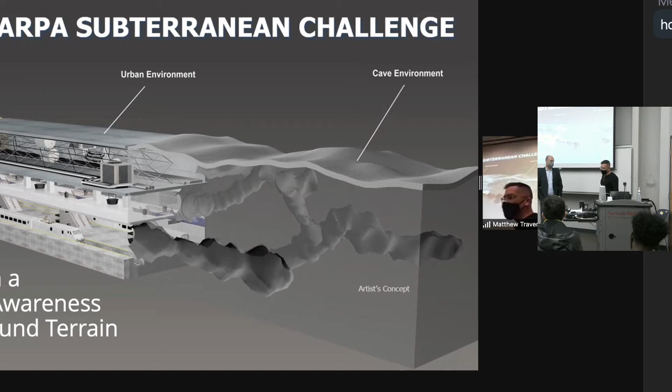For anyone who's not familiar with the challenge, the idea was to go and rapidly gain situational awareness in underground environments. There were several different target environments corresponding to the 3 years of the program. The first was tunnels, the second was urban infrastructure, underground infrastructure like a subway system, and then the last was cave. They weren't necessarily meant to be growing in complexity.

There were roughly 3 circuit events over 3 years: tunnel, urban, and cave. Cave was actually canceled due to COVID, but the final competition, which was just in September of this year, 2021, was actually a combination of all 3 of these. We'll show you some videos from the actual competition. But at a high level, that was the challenge.

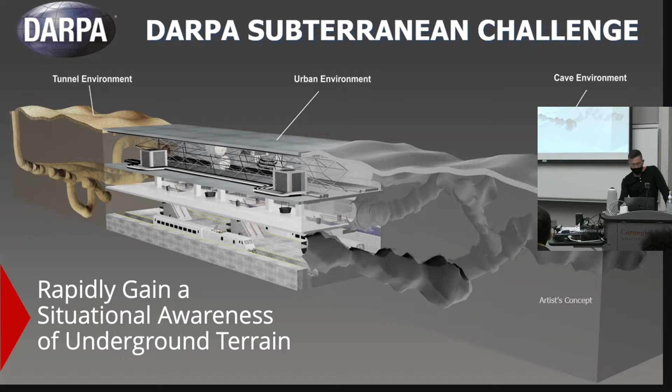So these are some of the different things - this is like the kitchen sink of full stack robotics, a phrase that gets thrown around a lot now. This was everything and then some, so all of the different challenges we faced, from sensing to comms to planning to aerial robots to ground robots, multi-vehicle coordination, and everything it actually takes to make that work.

So that was one of the reasons - not everybody has this use case of being underground, but in terms of stressing your robots and putting them in an environment or situation where you really have to go and solve the problems in order to make it work.

Also you have to correctly localize the artifact in a map that you're building and then recognize its type. So you have to have the perception working with the mapping, and then have everything - for us, it was then sending that information back over the comms network to the base stations to try to score points.

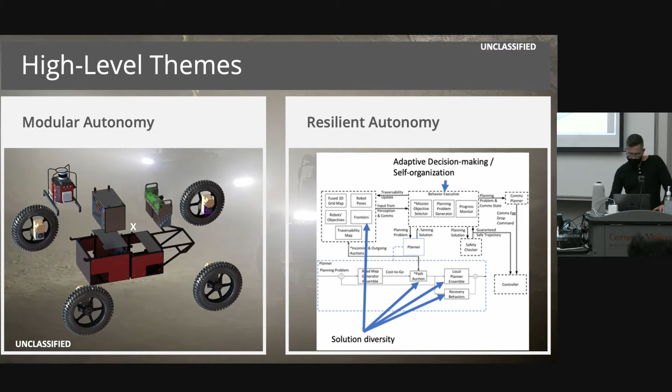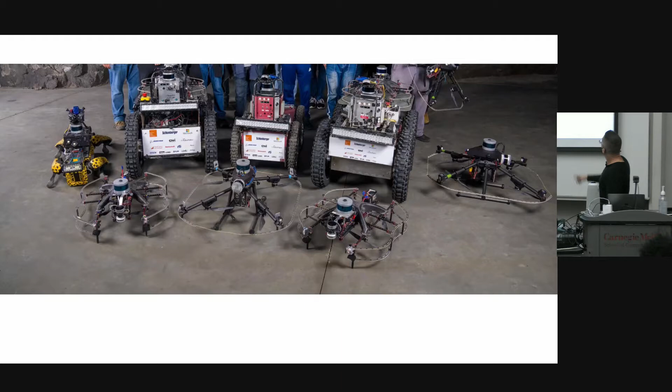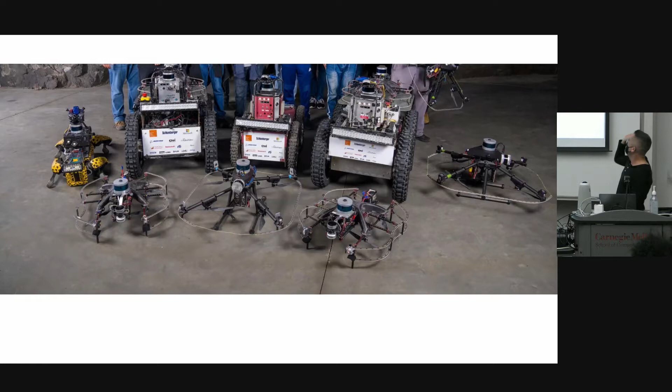All right, so for better or worse, all but the Spot robot, we built all of our own hardware. So it turned out to be 3 ground vehicles, a bunch of drones, 7 drones in total. These custom drones we built, this was a company actually started by 2 former Robograds called Canary. These larger drones, and then everything else was custom except for the Spot, but the payloads on everything were custom. So there are several different generations of payloads, and a ton of hardware that we built.

One of the interesting things, I'll show this in the next slide, that was a huge challenge for us was, you go out and design autonomous robots. I can tell you how to do inverse kinematics, right? But having to deal with the communications underground, it's primarily line of sight. So you can't just stick a radio down a tunnel and hope for the best. It's actually mostly line of sight, depending on what your radio is. So this is a huge problem.

I mean, we still haven't solved it. We've barely even scratched the surface after 3 years, to be honest with you. It was one of the things in the final competition that gave us a lot of pause was actually the comms, and we'll get more into that. But these were something we were particularly proud of.

The robots autonomously laid out these nodes, and I'll get into some of the details on this as it went down the tunnel. We built everything other than the radios, everything to drop the nodes, the whole 9 yards.

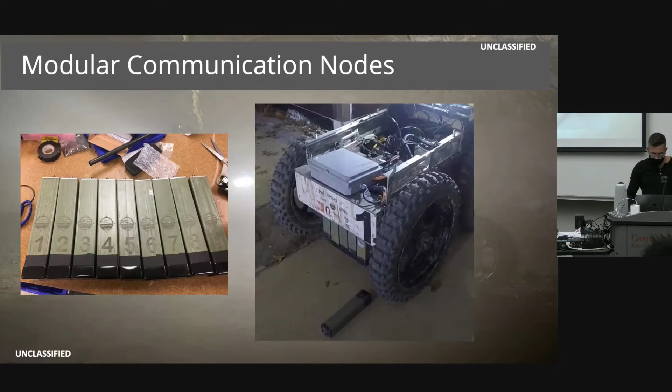And then this gives you some high-level systems diagram for the actual autonomy itself. So again, it's everything in the kitchen sink, but it's a full stack, right? It's starting from scratch, and then you have to do everything, from the low-level controls, sending motor controls to the motors, all the way up to the mapping, the estimation, map building, and everything in between. Modular, resilient, and scalable, is our overall philosophy from the autonomy perspective.

All right, Sebastian. Okay, so I think like Matt said, there's a lot of cool technical things that we implemented and developed over the couple of years, and we just want to show you a couple of them. Unfortunately, we can't show you everything, that would take probably half a day. So we just kind of picked a couple of things to highlight.

So one of the things that might also be interesting to some of you is we developed a SLAM algorithm, and there's a lot of people from the team also in the audience here, so if there's any detailed questions, we can defer them here. The high-level idea for this was that IMUs can give you very good data for SLAM, but they're usually used as kind of an afterthought, or just as an initial guess. The idea was to try and turn it around and use the IMU as my main source of odometry, and then use external sources of odometry as a way to correct the drift of the IMU.

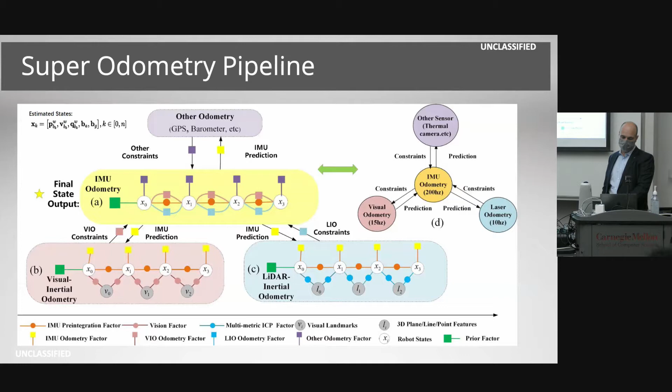So it's basically a couple of different smaller factor graphs that are set up and interact with each other. And so that was running on all the robots, so all the mapping results you see from here.

And another thing we had to look at is, how do we make this work in a wide range of environments? One of the things we wanted to avoid is, we can't just make it work in hallways or a cave or a tunnel, right? It has to work in all of these environments. And so some of the things you can get away with in a kind of research algorithm, we actually had to address.

It's automatically trying to scale which features are used for calculation depending on the size of the environment. So if you're in a hallway, use more features from closer in. If you're in a wider open space, use less.

Similarly for computation, the drones can process less than the ground robots, so they use a different computational budget, and it's adjusting to that. Another example is dust. Typically dust will cause a lot of features close by that your SLAM algorithm might get confused by, so detecting that dust and then ignoring it is another feature we essentially had to end up developing.

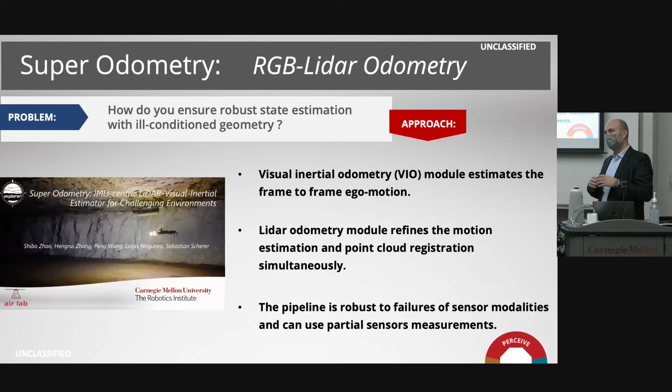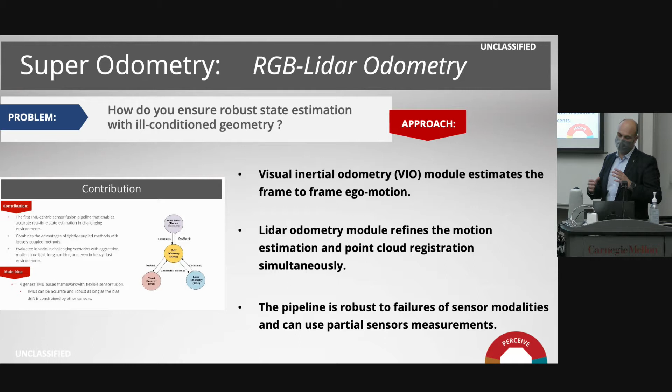As part of the challenge, we developed different pieces, like visual, LiDAR, IMU odometry. In the actual challenge, we only used the LiDAR component because that was the most mature. Some of the visual parts used too much computation, and we didn't feel they were mature enough, and we actually didn't need them because it worked good enough.

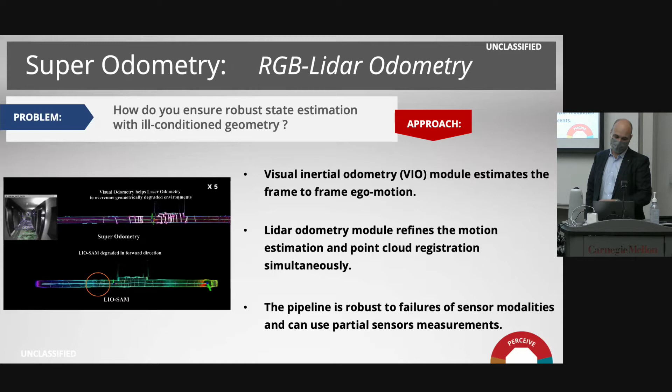But as part of it, here's a visual part. If you're in really degraded situations, a LiDAR alone will not give you enough information.

Similarly, part of the challenge was to push further. There was fog in the environment, and if the fog is really dense, you can't see through it. So we also developed thermal inertial odometry that can keep estimating in fog. But it turned out in the challenge the fog wasn't dense enough to really be a large issue for the odometry, so we did not deploy this.

Part of the challenge is object detection and localizing these objects, like Matt mentioned. There's actually a lot more than just an object detector that goes with it.

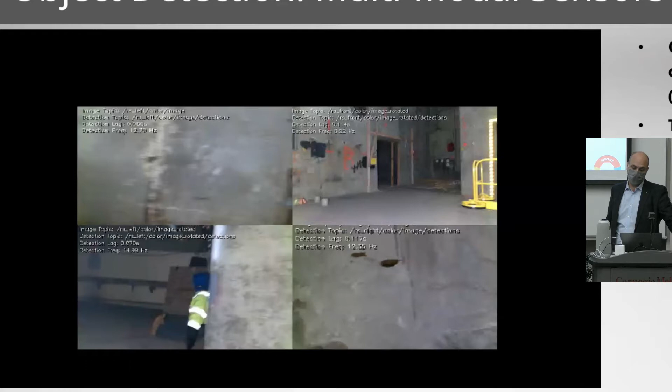For the visual objects, we basically create a bunch of 3D estimates and then cluster them together, and then create an object detection that gets sent to the base station. Those estimates can come from visual as well as the thermal camera. There would have been good opportunities to do 3D object classification, but for time reasons we didn't get there.

On the planning side, we'll talk about a couple of different interesting bits for the different robots.

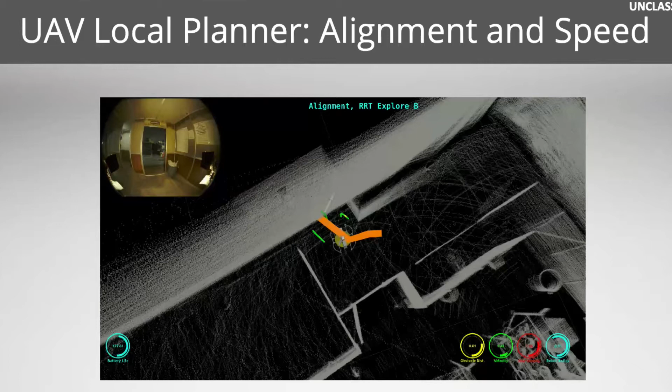One of the things that's pretty hard for the drone side is how do you fly through narrow spaces? Our drones are 60 centimeters wide, and we want to fly through spaces that are maybe 70 centimeters wide. So the drones essentially detect when there's a narrow passage, line up, go through, and then fly through these narrow spaces. You can see here, this is from the final competition where the drone flies.

Also, we want to fly as fast as possible since our flight time is limited. We only have 10 minutes, so we want to really go fast when we get the chance. Here's a wider open space, so the drone will try to go about 2.5 meters a second and cover as much area as it can.

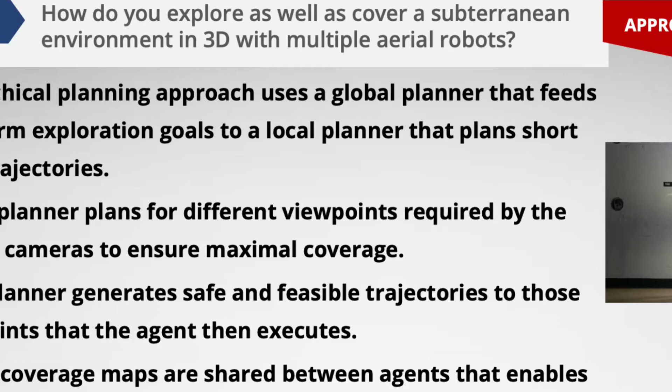So once we can fly, we have to figure out where we're going to go. All of this has to happen in real time on the robots while all the other pieces are running: SLAM, object detection, flight control. So there's a lot of stuff happening on the robots, so we have to make lots of trade-offs for all the different components in terms of computation for SLAM versus how much do we give to planning versus exploration, object detection, and so on. For the exploration, a large part of it is, how do we get it fast enough and within enough computational budget?

So the approach we took is the following. The other thing that's worth noting is that it's not purely an exploration problem. Like your typical classical exploration, you'd say, okay, how much of the map have I seen? So it tells you, if you have your LiDAR, if you move, how much of this white area have I covered?

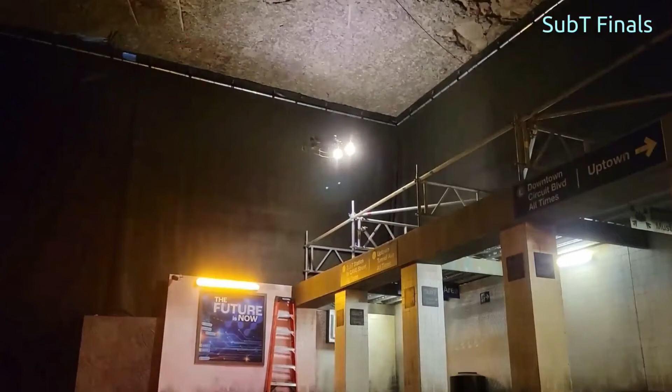And here you can kind of see going into some of the narrower areas. Part of the challenge for the exploration is, in these larger areas for example, how do you trade off between covering a wide area very well versus going to a smaller opening that could get you to even more information to find? That's often a tricky challenge that we have to navigate.

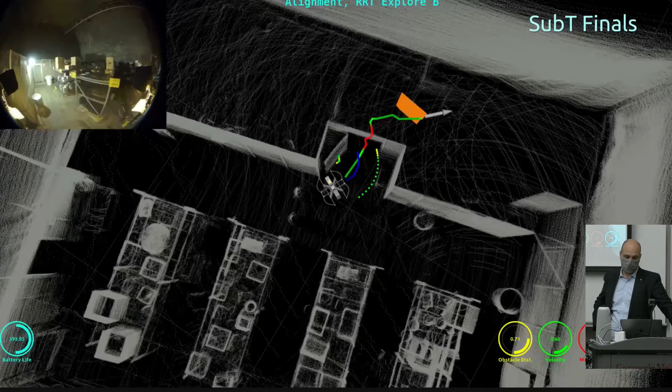See if there's anything else. So here's, for example, some of the experiments at Laurel Caverns. The robot will explore in 3D, so it will essentially go up and down, and it's not really afraid of getting close to things.

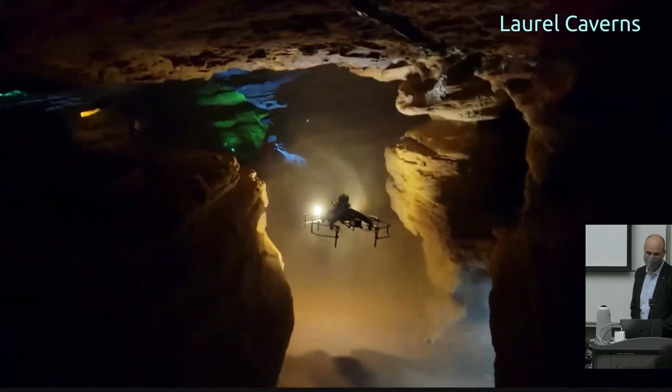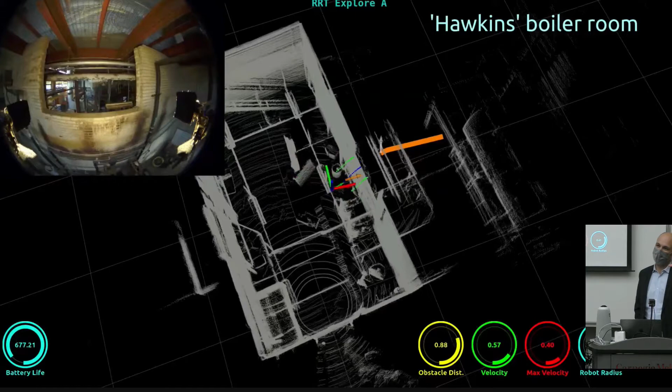One other thing that is a bit of a challenge with the particular setup of a robot is that we have a Velodyne sensor on there, and it only has a 30-degree field of view. So when you're flying in something that is very 3D, it's difficult to decide, can you actually go up or down, or is there more to explore? For example, Laurel Caverns has a 30-degree kind of slope, which is exactly at the limit of what you'd actually see.

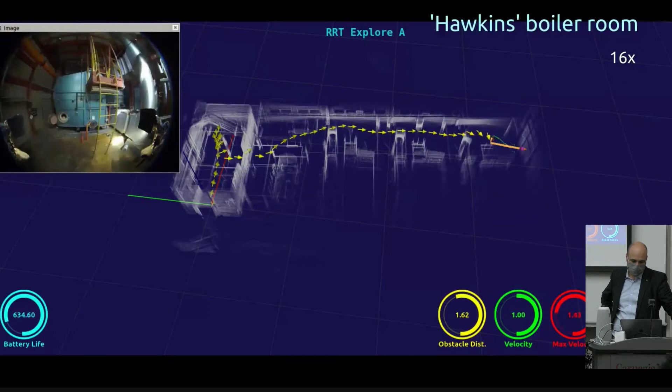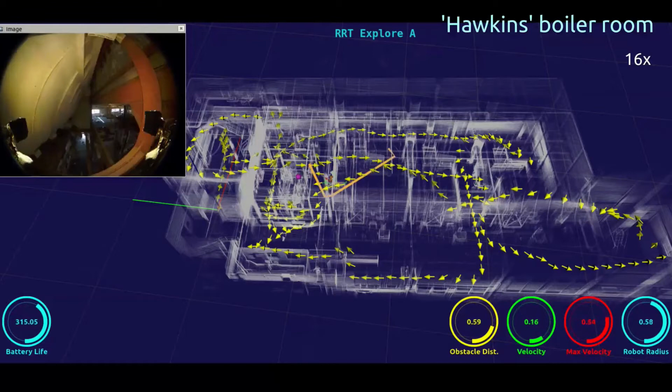Here you can kind of see a fast forward of an entire run inside a boiler, the steam boiler plant. One of the things we'll talk about a little bit more later, but what makes this really tricky is you want this to be resilient. Sometimes your robot will get stuck, sometimes there's dust, and we'll have to recover from all of this.

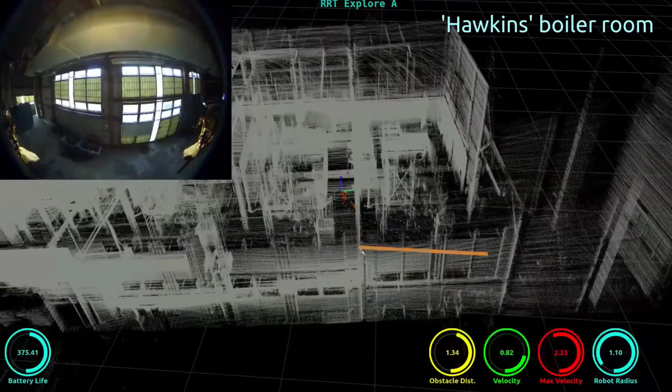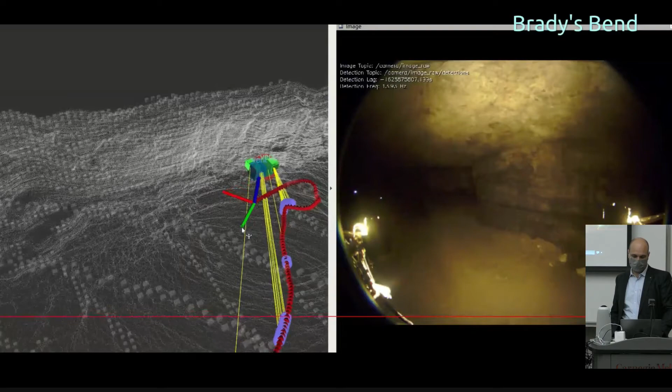So the robots will also coordinate with each other in two ways. They share the coverage maps with each other and what are promising areas to go to. The other part is they also share roadmaps. So if some robot finds a promising spot, the other robot knows how to get to that location via the roadmap. Here you can see some of the maps that we ended up with.

All right, so for what it's worth, Sebastian was talking about the aerial robot coordination. We used two different coordination strategies for the ground and aerial robots. With the aerial robots we had to do viewpoint planning, but with the ground robots we had cameras pointing in all four directions, so the actual viewpoint planning problem was a lot different.

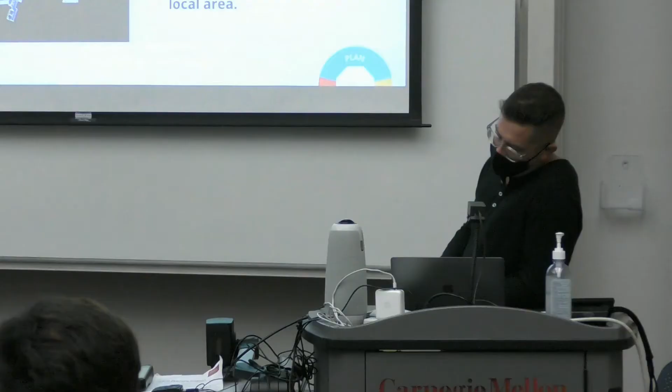This is a paper Chao wrote, I think it won a best systems paper at RSS this year, which was basically the global planner that we used in the competition. And it worked. It worked well.

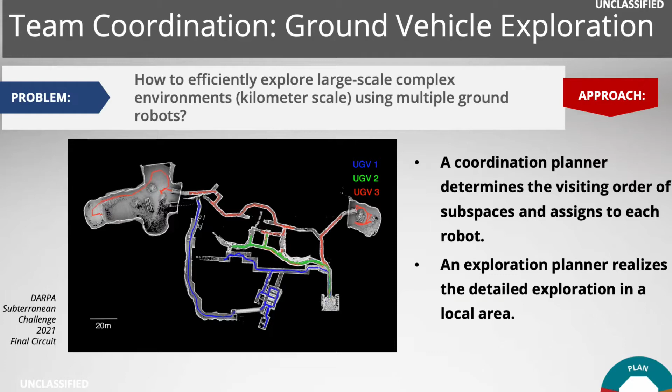The illustration here shows a map from the final competition. If you've seen outside of my office, this is where R3 actually went off the cliff. But the coordination, in terms of how well the ground robots and the total coordination really worked - we did explore the most area. We saw like 95% of the map, our little feather in our cap, so to speak.

It was a hierarchical thing, where you're basically planning in the global map, and then within each sub-region you have a local planner. I would highly encourage you to go talk to Chao or read the paper.

But it was impressive. By the time we were getting ready for the final competition, it was like set it and forget it. We were testing at this abandoned VA hospital down the road. It was an illustrious 3 years.

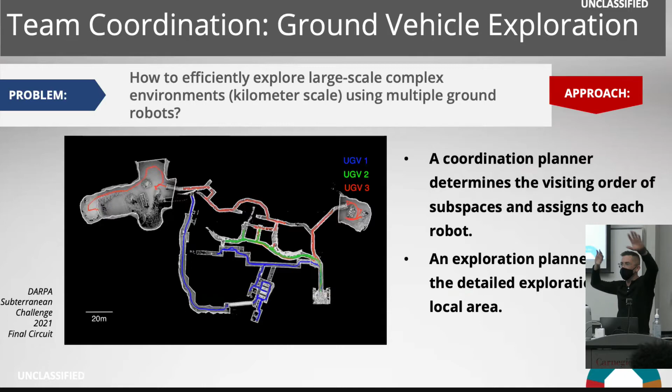You literally hit the button and the ground robots would go out, and an hour later - the run times were an hour - typically they'd go out of comms since it's a big complex, like 12 different buildings all connected. So the robots would just go out, and an hour later they'd come back. Yeah, it was impressive.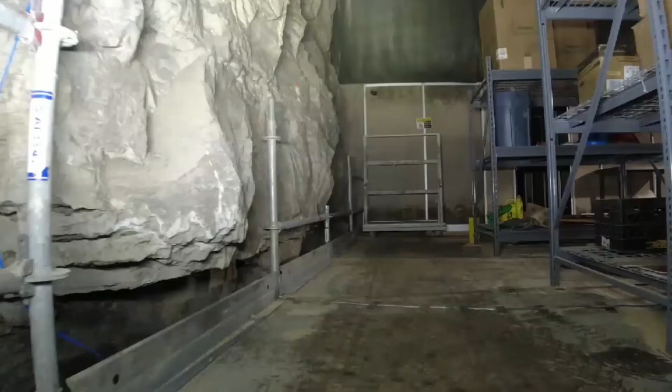Short video of the ground robots. So this, the prize round, what you're looking at - this was a set that DARPA created. Everything you're looking at was built on the inside of a mine. They had a Hollywood film crew come and actually design this set. We drove through one of the walls one day. But all of this was created just for this competition.

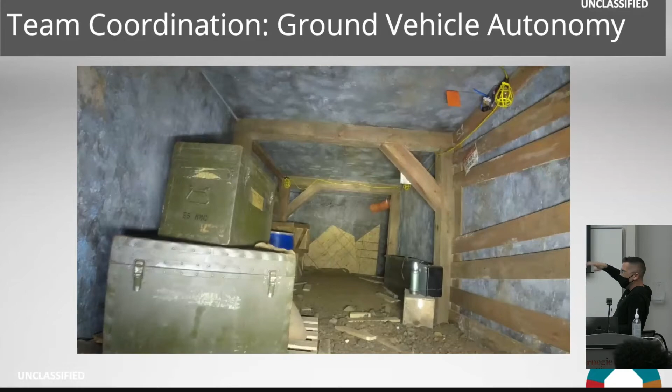I think there was an article from Victor from DARPA - I think the whole program was 87 million total, and they spent 10 mil just on building this. So it was the real deal, but all of this was created by them. They made it really look like the mine out in Colorado that we were at for the very beginning of the competition, the STIX event. This is almost exactly what that mine really ended up looking like. They did an amazing job.

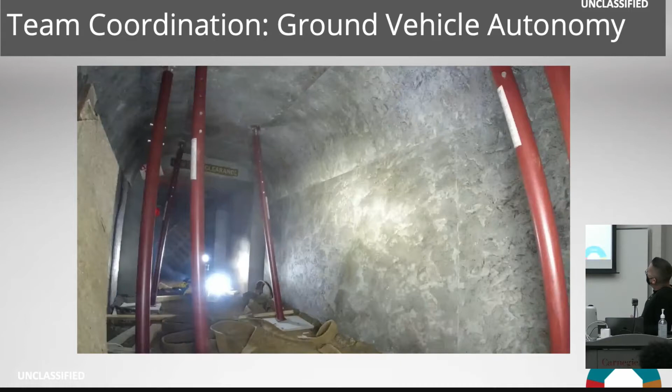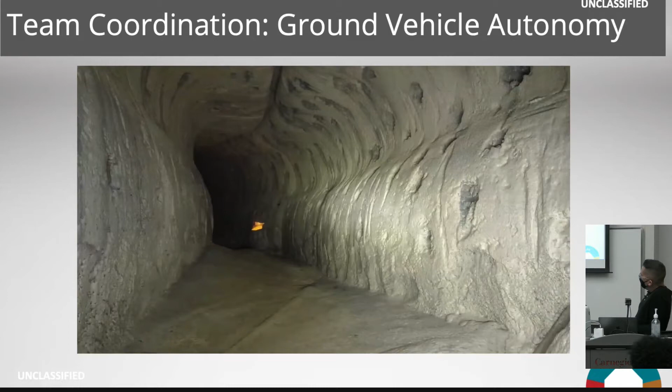But this is just showing you the mobility. We had 3 ground robots, 2 of which actually got stuck, I think, in the final competition. But this, the R3, the robot that eventually took the dive off the cliff, it was amazing - watching these videos of it gutting through all of these spaces and just plowing through was cool. This is showing you some of the different stuff.

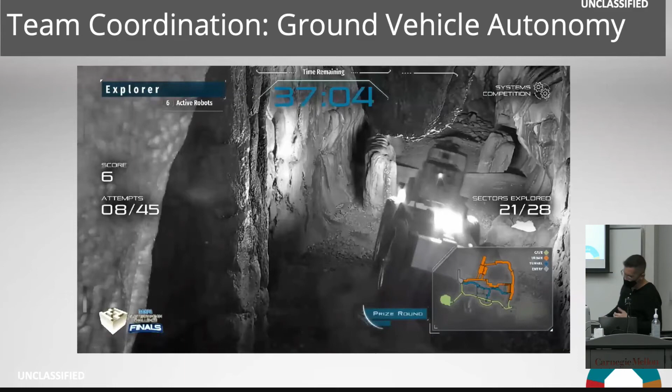But yeah, it was amazing, so we're happy to share. That's one of the dynamic obstacles - DARPA, during the final competition, changed the map by having dynamic obstacles, so you couldn't just leave a trail of breadcrumbs, so to speak, and then come back.

This was the final ascent. Worth watching.

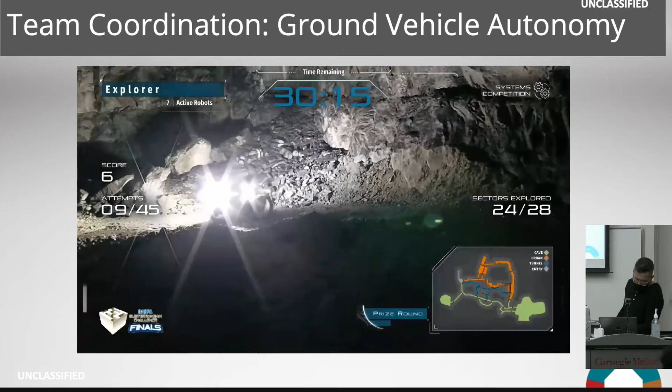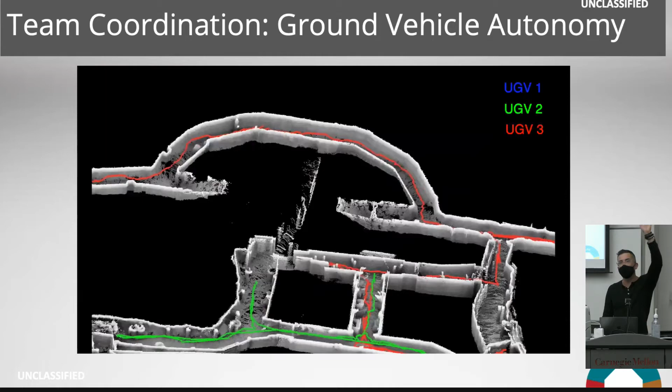It was the only robot, I think - I didn't show it - it was the only robot... oh yeah, we'll show it later at the end. But it was the only robot that actually made it back there and up onto that ledge, although I guess no robots made it back there in the end.

So another thing that was cool - ideally you'd send your robots out and they'd go in different directions, and you wouldn't necessarily have to solve the coordination problem, or rather the coordination problem would be much simpler to solve. Right, you go that way and I'll go this way.

You can sort of see from the map, the final competition actual area turned out to not be that large.

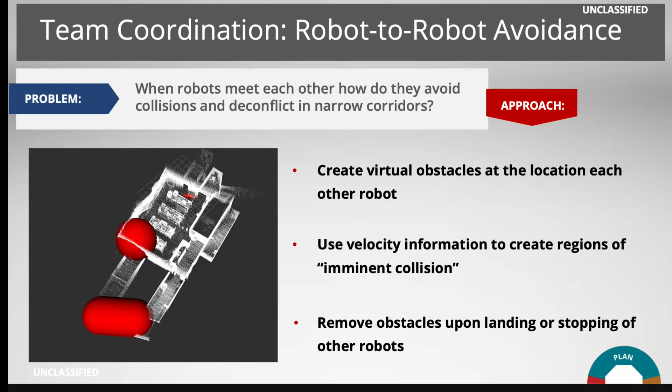So one of the things we had to really be prepared for was if the robots meet each other, what's going to happen. Especially in a narrow hallway, how do you deconflict? Definitely details you need to think about.

So this is cool, we had this. It's basically like a dynamic do not enter region, which is based on both the robot's position and its speed. It has this imminent collision region where it'll project forward using simple dynamics, basically its forward velocity, to see if in the future path the two robots are going to collide.

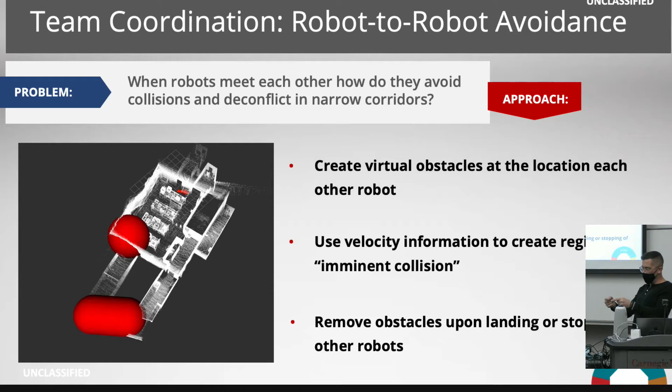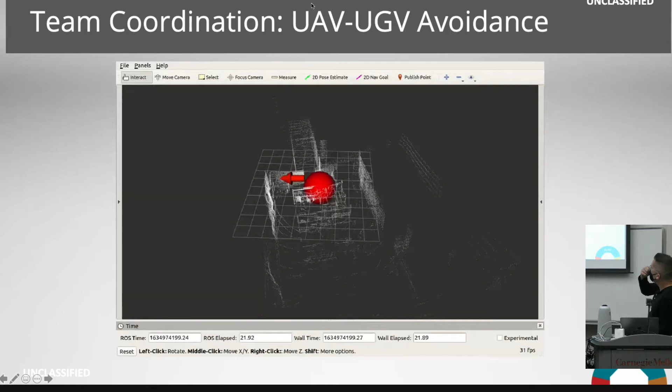I guess there's a view of this. This is roughly what it looks like. As the robot starts moving, you'll actually see the obstacle start to grow. It's actually way more difficult than you would think to make this work in reality, but we didn't have any robot deconfliction errors or anything. So it was cool.

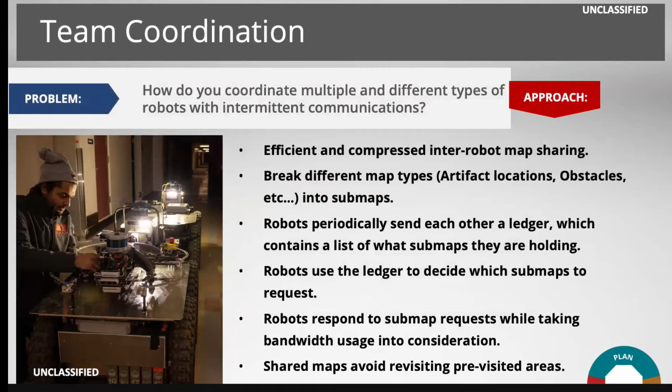All right, so this is another sort of what's in the sausage, so to speak, in terms of tools that will persist well past Subterranean Challenge in terms of raw engineering. There's a lot, right? Just saying you're going to have a multi-robot, multi-agent system is cool, you can go write papers about that. But if you're going to try to make this work in reality, and you're going to have the coordination, the mapping, and the exploration, you need a lot of foundation, a lot of plumbing to actually make all of that work.

Like having two robots be in the same area and having them have a mutual understanding, right? This robot has its map and this robot has its map, but knowing that things in those two maps correlate with each other is easier said than done.

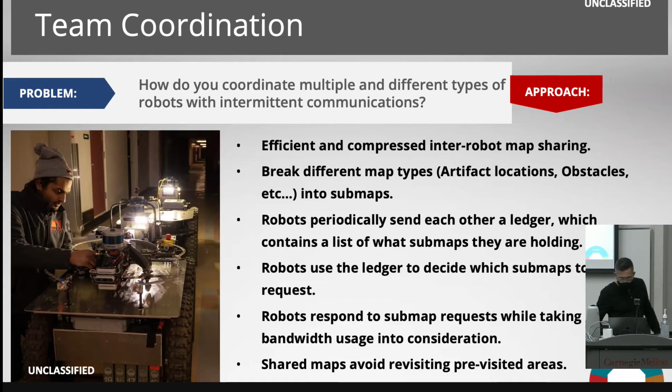So part of the solution we came up with is basically this ledger system, where the robots are always sharing, doing a handshaking and always just sharing information with each other so that everything is consistent. The robots don't have to have communications constantly - if they're out of comms, they don't have any information from the other robot, but if they come into comms, even if not connected to the base station, like they meet each other outside of comms a kilometer down a tunnel, they'll do this handshaking procedure just over wireless communications where they share information and make sure things are consistent between them.

So this is cool and it's easy to illustrate from maps. One of the really cool things we got out of this downstream was that it made it possible for the robots to also share artifacts with each other. So if one of the robots went out of comms and saw a bunch of artifacts, we could send, and we did send, a drone.

Actually, one of the ground robots got stuck during the final competition. We sent a drone out to basically fly by the ground vehicle and then come back to the base station because it got all the artifacts off of the ground vehicle that was stuck. And all of that just happens automatically, via the ledger. So we're sharing not just maps, but all of the pertinent information between the robots.

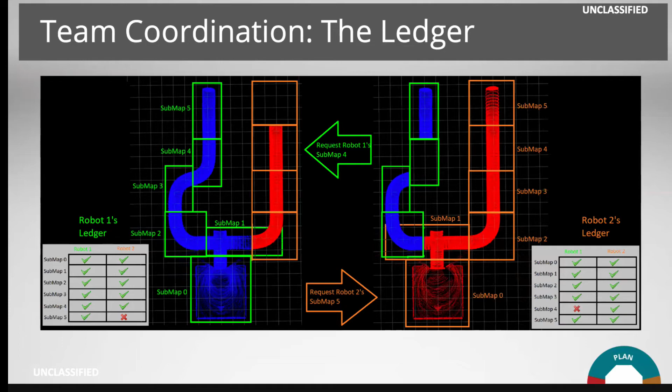And to really go and make this work - a lot of the other teams, it seemed like, had something similar, but this worked very well. John, who's sitting somewhere out there, was instrumental in helping to put this together.

So this was three years ago. I knew very little about communications underground for autonomy. We started out with wireless repeaters, basically nodes that you buy, whatever, Best Buy. And they were one of these canisters that got dropped out of the robot.

This was cool, the mechanical design was all done here. It was basically a latch that sat in a solenoid. So when it's active, it's in the latch, you apply current, latch opens, solenoid, and then it's gravity fed, so the nodes actually come out.

So there's multiple generations of this thing, the node dropper. Oh my god, going back, that was like the most complicated mechatronics project ever, this node dropper. But it was beautiful. By the time it ended up working, really, really well, it seemed robotic, for lack of a better description, if you actually watched how it worked. Which is good, right? Like you want your robot demos to effectively be boring, and this is working well.

I guess I'm quoted, but anyway, so we had to figure all of this out from the ground on up. So there's the mechanical aspect of it.

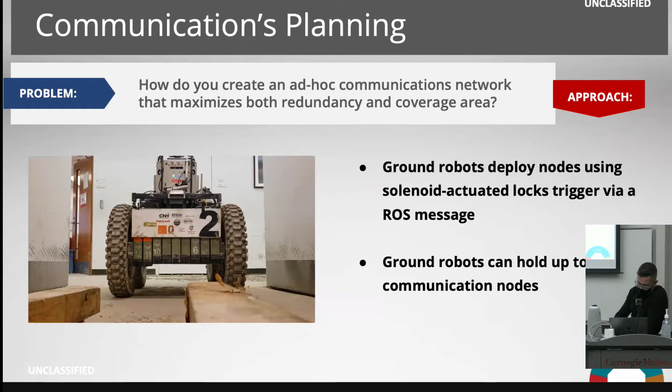This is cool. I had two master's students who wrote their theses basically just on doing this.

There are multiple different levels at which you get to think about optimizing the comms. Through each one of the nodes, you're going to get losses, so it's not just that you want to drop as many nodes as you possibly can. We only had 24 of them, so you have to be smart about where you drop them. And it's very geometry dependent. For the types of radios we were using, it's effectively almost just line of sight, and it depends on the environment. Long story short, you've got to be smart about where you drop the nodes, because you only have so many.

So we took into account signal strength, the actual distance, and line of sight, so the geometry of the environment. You're actually using the map. For example, if the robot's coming up to an intersection and it's already at the distance where it thinks it should drop the node, it'll wait to drop the node at the intersection because it's a better place to drop it. This is just some of the optimization.

RSSI is just the signal strength, for lack of a better description.

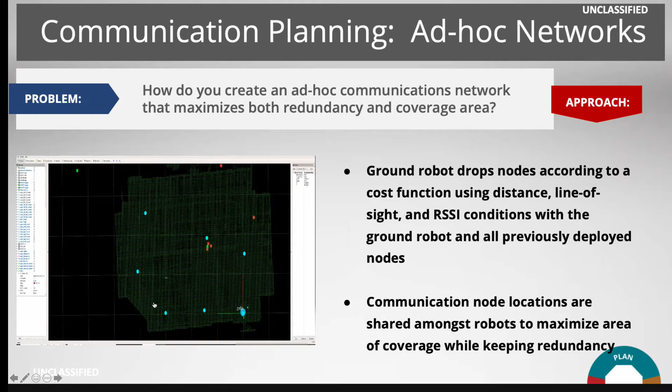We were doing some basic flow control. When you have, like we had, 10 robots all on one wireless communication, an ad hoc wireless mesh, you have to have something regulating the flow, or it'll just go crazy, even during nominal performance. You can optimize at the application level, meaning I'm not going to send more information than I have to, but at a certain point you just have information that you have to send. So figuring out how to do basic flow control, the entire thing was optimized. It was years worth of work, but it was cool. It worked, it worked perhaps too well in the final competition.

This is just again sort of what's in the sausage, showing how we did the prioritizing. I worked a ton on this, Ryan Darnley too, and I did a ton with working with DDS. Really, optimizing the whole entire comms pipeline was easily 3 years worth of work.

All right, cool. I'm going to go back over to Bash here.

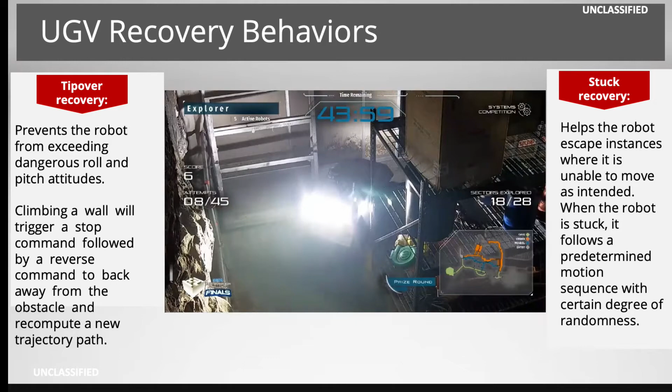Similarly, for the UGVs, sometimes they might get stuck, like here in a door, or other areas where maybe there's fog, they can't decide what to do, and the ground rovers always have to keep on doing something. So they have two things: one is tip-over recovery, where at a certain angle they will basically undo what they just did to avoid tipping over, and then there's stuck recovery behaviors, where if the rover gets stuck, it will start executing certain back and forth motions to try to get itself out of a situation.

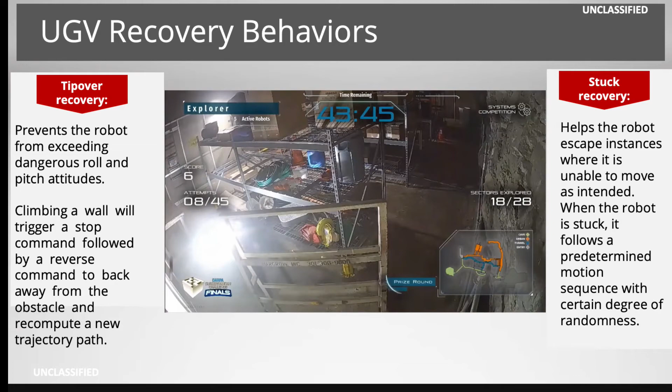Those motions happen blindly, and there's actually good motivation for this. If you're in a tunnel, as long as your angle with respect to the wall is shallow enough, even if you just go straight, you'll basically bounce off the tunnel wall.

In the final competition, the walls weren't as solid as what we were used to, so we drove through one of the walls in a situation where we got stuck trying to get ourselves out of a difficult situation.

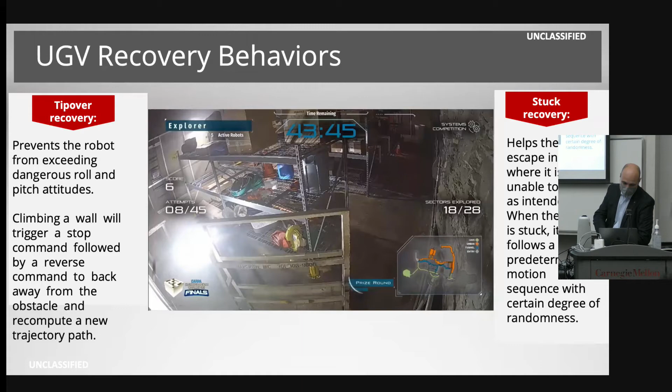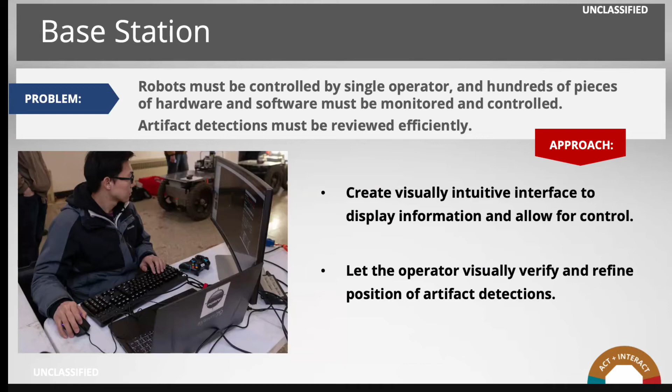For our base station, the idea is really two things. We want to be able to know that the robots are working, so there's some status information. The other is that before we send off a report to DARPA, we review it to make sure we like what it looks like. There's a picture with it, and we make sure the object detection did a good job in terms of classifying, or change the classifications.

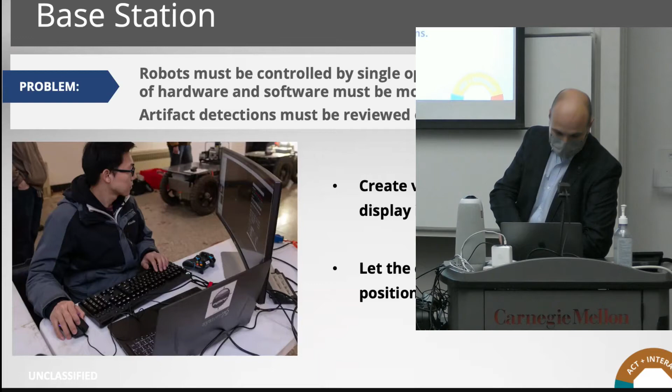Our operator, Chow, who's also in the picture, goes through this list of artifacts and then decides what those artifacts are.

Something else that turned out pretty interesting is that we used behavior trees to encode the different behaviors and states a robot could be in. As an operator, even though there's a tiny picture, at some point you can just look at this and get an intuitive view of what's going on. After you've seen the robot do enough things, as a human you develop this kind of pattern match very quickly.

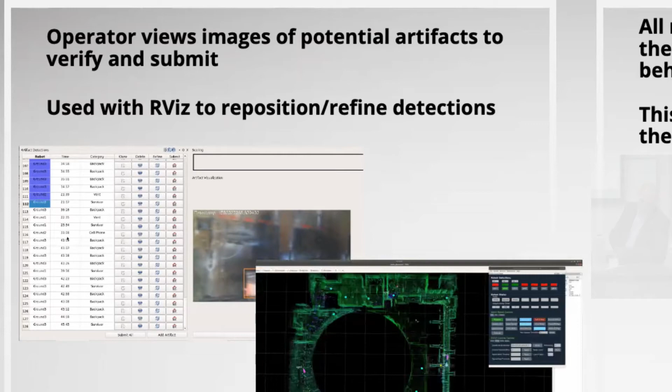Additionally, you also have a map associated with the artifacts, so you can check the location of these artifacts.

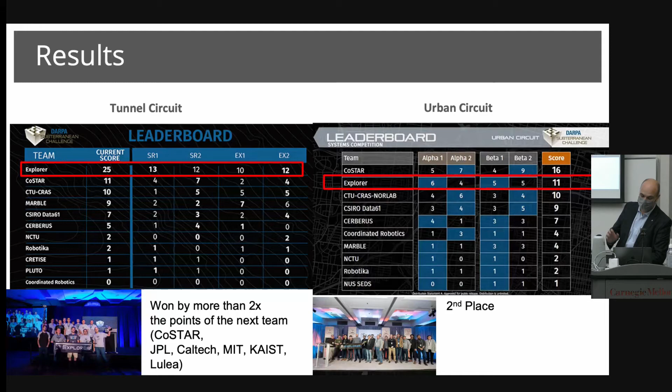So now, how did we do? To summarize: for the tunnel circuit, we placed first, more than 2x the points of the next team. For the urban circuit, we placed second, and for the final circuit, we placed fourth, and like Matt said, we explored most of the course.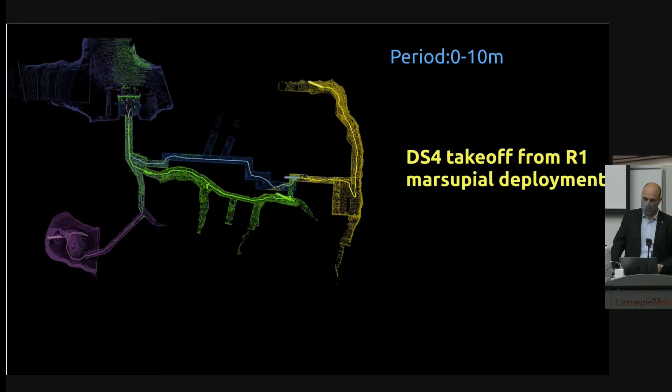R1 then turns around and launches a drone - you'll see a new icon pop up, a yellow one. R2 is stuck in the tunnel in a big area of fog; this is the section I showed before where it gets stuck in the fog. R3 is out exploring some cave environment, and R1 is off exploring more of the urban circuit.

At this point, R1 is exploring more of the urban area, R3 is still off exploring, and R2 is still stuck.

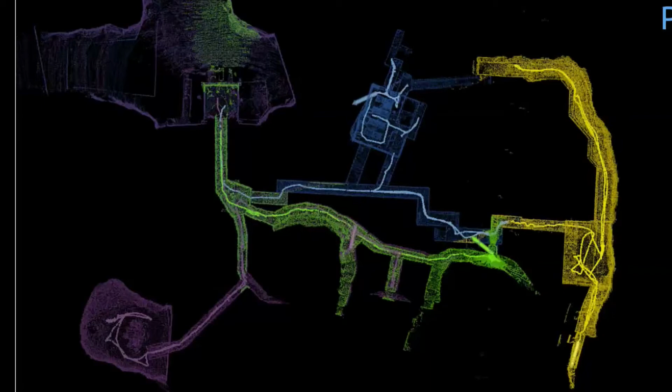At some point here, R1 is going to go through a little tunnel section - you can already start seeing it goes down this section that the drone explored before, and through this area.

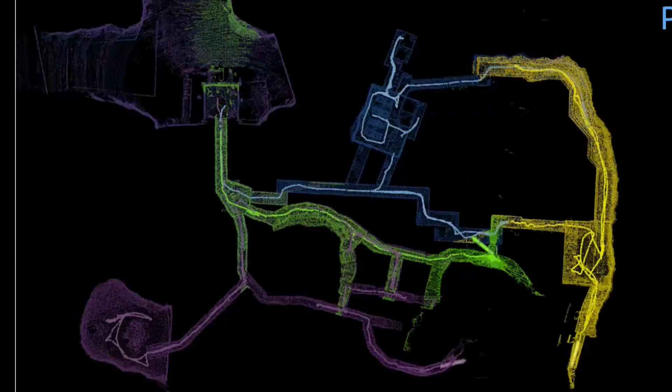Here's this section coming up where the dynamic obstacle closed, and I think somewhere around here, this area kind of slopes down.

We lose communication with R3 somewhere around here. At this point we're about halfway in, and we've explored most sectors.

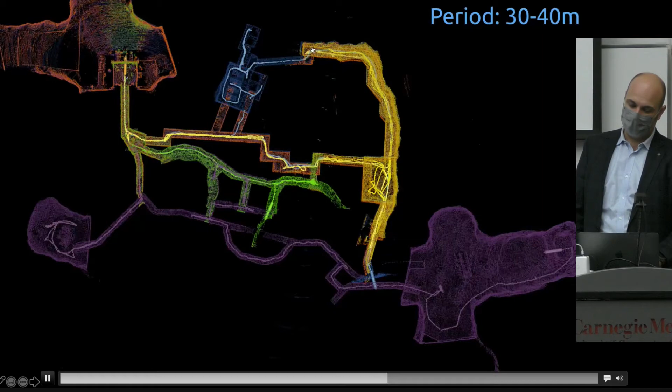R1 is stuck in this cave section that was like a funnel environment, so it's stuck here. The drone that we sent from the base station essentially gathered the objects that R1 didn't communicate back, since R1 lost communication in this tunnel section, so the drone flew in and was able to gather it.

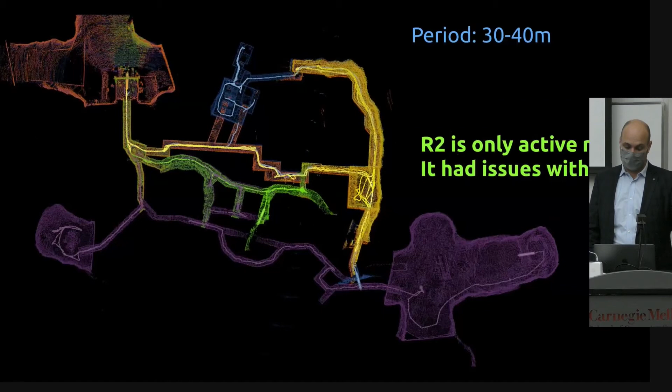By this point we know we haven't heard from R3 in a long time, and we're trying to figure out what's going on. And we know R1 is stuck.

R2 is coming back finally out of the fog. It kind of got itself free. So I think we sent out DS1, another drone, to try and potentially gather data from R3.

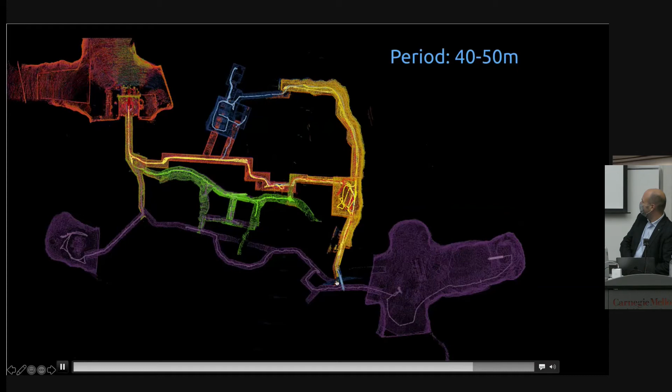But we actually didn't know that R3 had fallen off a cliff at that point. I think we had no communication - we hadn't had communication with the robot for a long time. Also, R1 was actually wedged in the cave, so it wouldn't have been able to get through, but potentially might have had communication.

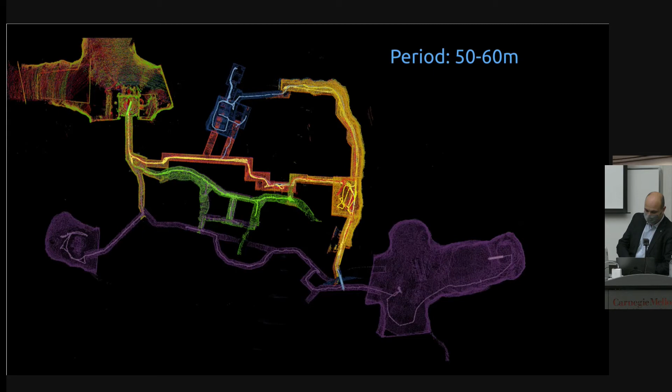The last, I'd say, 20 minutes we were mainly focused on looking at artifacts, and we received around 500-600 artifact reports, which was much more than we had ever seen before. It took our operator a long time to go through these artifacts, and that was kind of the run in a nutshell.

You can see here, this is the combined map of the 3 ground robots. The way we create this registered map for the run: DARPA establishes a coordinate frame, and we calibrate the first robot, which I think might be R1 or R2, to that.

Then all the other robots localize to that first robot that we calibrated, mainly to save time, because the calibration - we basically take 2 points with a total station, a survey instrument, to establish that reference system - but then doing this alignment is much quicker.

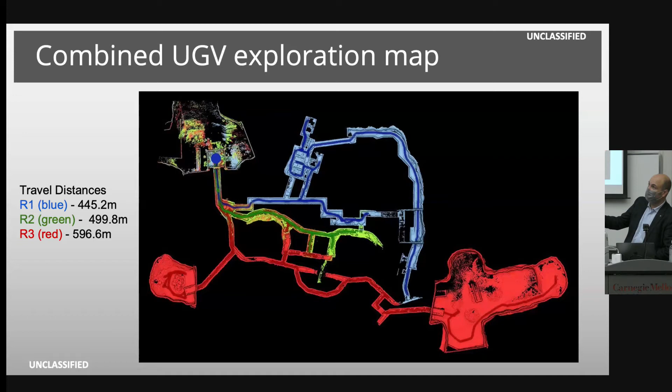And then these are the maps for the three drones. One interesting thing to observe is that typically our ground robots cover much larger areas, driving on the order of kilometers, but since that map was so small, actually the drones and ground robots cover similar distances.

There's a period at the end where we typically submit all gas and cell phones, because they require some refinement - we only see this cloud and it tries to find a maximum location, which isn't very accurate, so we look in the map a bit and take educated guesses. But if we hadn't done that and just submitted what we had in the base station, we would have placed third.

If we had time to essentially adjust cell phones and gas that we had data for, we could have potentially placed first. And if we had gotten artifacts from R3 before it fell down a cliff, or if our strategy hadn't been as aggressive and we had just submitted all the artifacts, our score would have been 24. If we had everything together, it could have been 29.

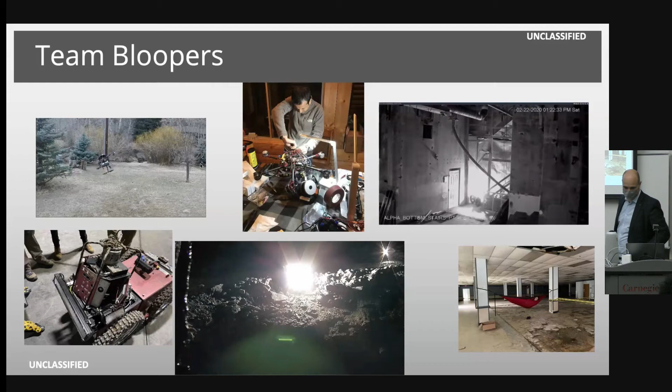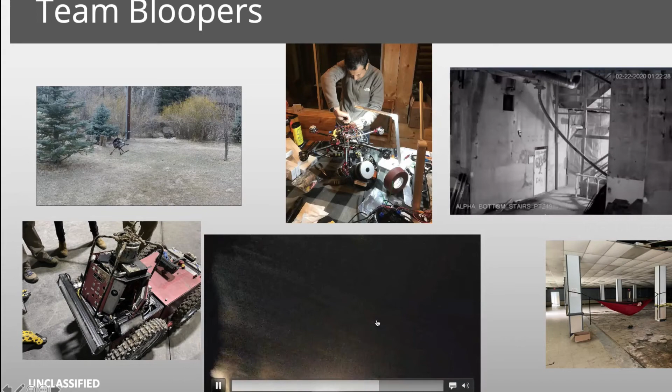Definitely a robot flipping over right here. It's trying to actually come back up now. It realized it can't make it, and then it just drops off and lands at the bottom of the cliff. Then on the top left here is a slow motion video of a drone disintegrating in flight because of some oscillation.

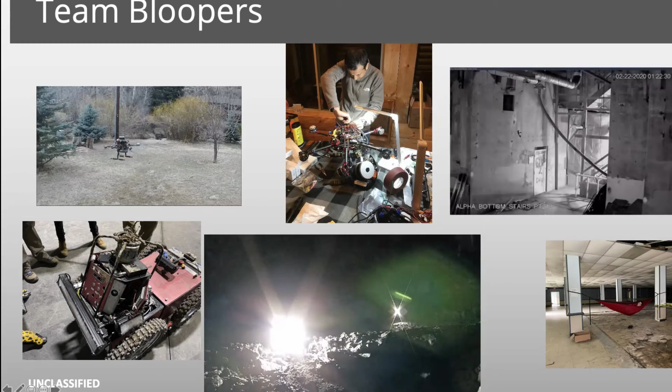That was also an exciting night, which is the picture to the right here, trying to get that ready for the test the next day.

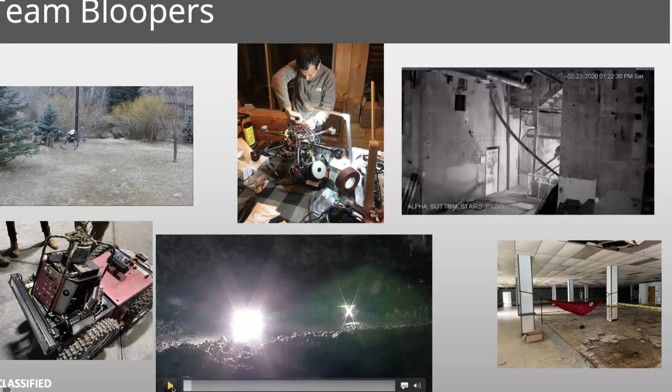So this is the last slide here, and of course I didn't mention any names—I guess there's a lot of people. I'm just kind of the reporter here. There's a lot of work, a lot of awesome people that I'm glad we could share with you. Thank you.

Questions from the crowd?

So I have a question about the use of LiDAR on the drones. Why was purely visual localization, or just purely visual information, not enough in the caves? Or another way to put that—how necessary was LiDAR information?

Yeah, it was much more reliable, quickly—that's kind of the end answer. Doing visual SLAM in dark environments is very tricky with little drift. You wanted to have less than 5 meters of drift after 200 meters through very ill-lit situations. It was just not possible three years ago, or maybe it's still not possible today.